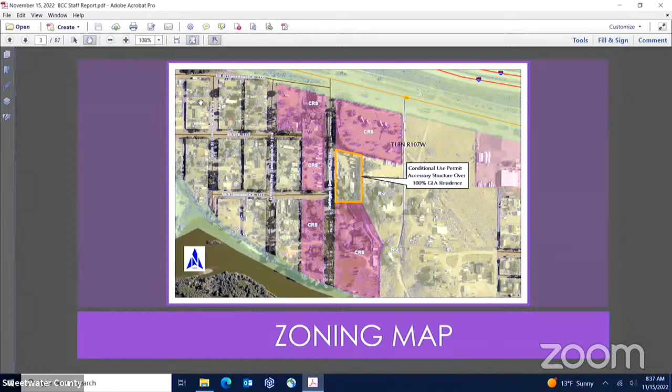Again, there are some R2 adjacent properties, but they're up on the hill and a little bit over. It's definitely mixed ownership in this area of Jamestown. Just a little bit of background: the reason why we're here today is because Corey Bernard is wanting to build a 5,600 square foot garage that will be roughly 35 feet in height and attach it to his existing home.

The garage is proposed to be roughly 70 feet by 80 feet. This would exceed his primary residence by about 2,000 square feet, so it's a pretty large structure on the property. Per our Sweetwater County zoning regulations, this can be done by going through the conditional use process, and that's why we're here today. Just in the last couple of weeks, we've gotten a lot of information coming forward.

So just wanted to let you know that in discussions with both Corey and his wife Bridget, we've been assured this is not just going to be a big metal shop. It'll be stuccoed or finished in something to blend with the house. He wants both the garage and his home to look like one cohesive structure. They plan to use the garage as storage for their motorhome, boat, and other equipment currently sitting out in the weather.

While I was visiting the site with Mr. Jim Zimmerman on November 1st, we were also told that they have already purchased the building materials for this garage, and they are already on site, which you can see in the additional photos when we get to that point. Corey is also still working with his attorney and our Sweetwater County attorney, John De Leon, on resolving an encroachment issue with his retaining wall being in the Sweetwater County road right of way for Washington Street.

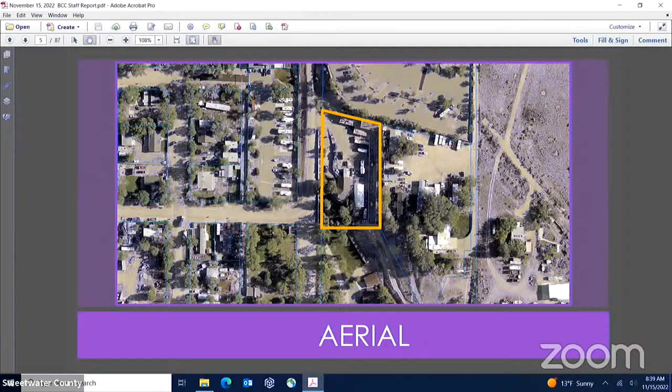Here you can see the proposed garage and where it should be situated on the site. You can see him calling out where those concrete walls and everything are and where it's going to sit in relationship to his house that is currently on site.

Here's the floor plan that he proposed. There will be 4 garage doors on the north side of the structure, and also in conversations with Corey, we've been told that on the west side, facing Washington Street, there will also be large windows in an attempt to make it not look like a big metal building, more kind of make it look a little bit more residential.

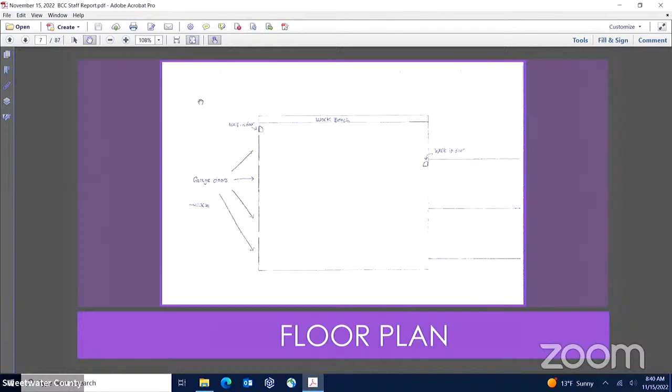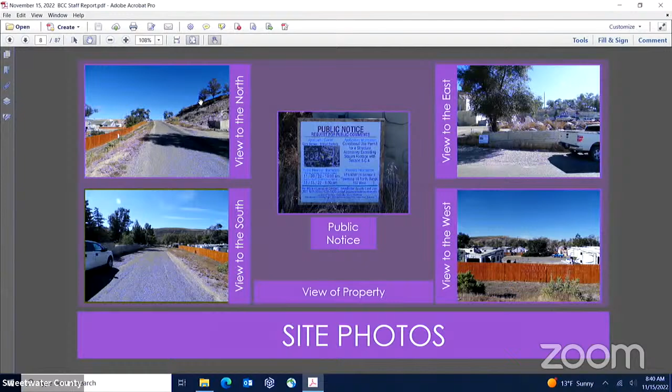Mr. Jim Zimmerman went out and posted pictures on the property for public notice. You can see the retaining wall in the view to the east that is dealing with the encroachment we'll probably get into a little bit further today. We've also chosen to take a few more pictures to show the other retaining walls on the property and just where the building will sit. In the bottom two on the left, you can see where the retaining walls are, and you can see all of his Conex boxes, the motorhome, other construction equipment out there.

That's pretty much where that building is going to be sitting. And then in the top middle picture and the bottom right, that's the retaining wall that is in the Washington Street right of way.

Mr. Chairman. Megan. Yes, when you look at that bottom picture on the bottom left, the bottom two, that's where you're saying the building's going to be placed. How, with the building being 35 feet high, how much of it will be sticking out of that hole above those walls?

That is a very good question. One of the things we can't really do right now as a land use department is we don't have software, and we've not been provided by the applicant even a 3D rendering to judge the height of it with existing features on the property. And I am not seeing Mr. Bernard or his wife here today. I'm not sure where they are at. They were here last week and were told about the meeting this week.

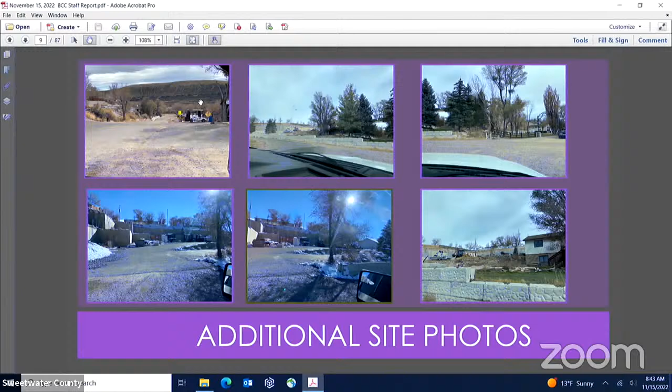Thank you. Thank you.

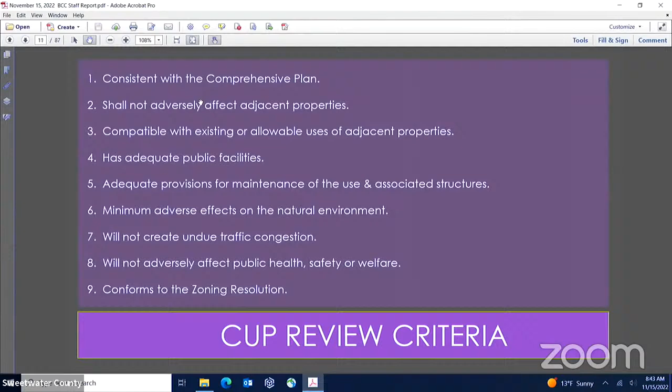We've got 9 review criteria for the conditional use process, and we'll jump right into it. The first one is: is this conditional use process consistent with the comprehensive plan?

The comprehensive plan encourages orderly growth and development in locations that contribute to the economic and social well-being of county residents. I've chosen to combine criteria 2 and 3 for ease of explanation and fact finding.

Criteria 2 and 3: shall not adversely affect adjacent properties and should be compatible with existing and allowable uses of adjacent properties. The proposed garage is nearly 2,000 square feet larger than the existing home and is proposed to be 35 feet tall, which would be the maximum for an R2 zone property. Even though the property sits much lower than the properties to the north and east, the proposed garage would still be extremely large and uncharacteristic for the area.

As of right now, there are no other buildings this large in the tight vicinity shown on the previous zoning map. But keep in mind that on commercial and recreational services, CRS zone property, you can have large commercial structures, as I've mentioned before. So please keep that in mind as we go forward, even though it's not allowed under the use chart — we need to keep in mind how the area is zoned in general as well.

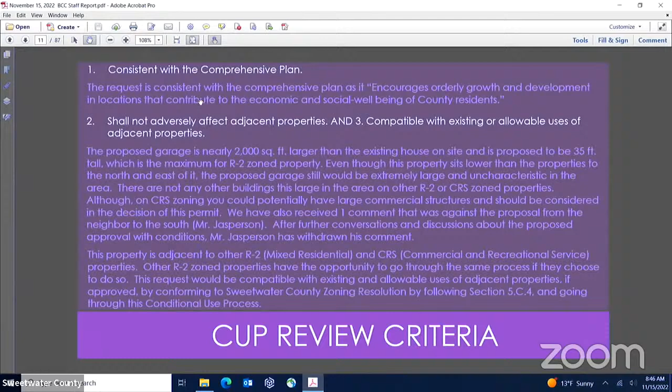Criteria number 4: the property does have all adequate facilities required for a residential property. Criteria number 5: adequate provisions for maintenance of the use and associated structures.

Mr. Bernard will have to get an approved construction permit if this conditional use permit is approved. He has already applied for a construction permit, so we have that on file — that's actually one of the conditions we'll get into further. If both the conditional use permit and construction permit are approved, Mr. Jim Zimmerman will have to go on site to inspect the garage after construction is complete.

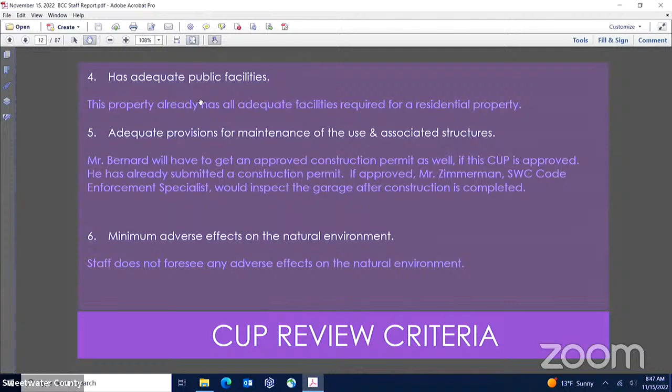Criteria number 6: staff does not foresee any adverse effects on the natural environment. Criteria number 7: will not create undue traffic congestion — as long as the garage is used for residential purposes, staff sees no problems there. Will not adversely affect public health, safety, or welfare, and staff does not foresee any issues with these items.

And criteria number 9: conforms with the zoning resolution. This request does conform, since that is the whole reason we are here today — to go through the conditional use process.

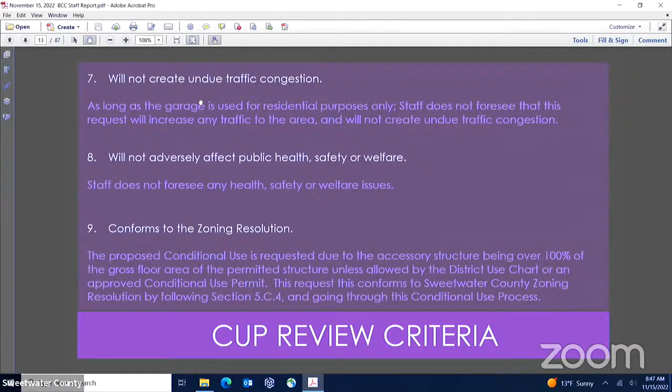Colorado Interstate Gas was the only agency that responded to our comment forms that went out, and they don't have any facilities in the area, so they have no concerns with this conditional use permit.

At last week's meeting on November 9th, 2022, the Planning and Zoning Commission voted 5-0 to recommend approval with the following conditions: the wall encroachment into Sweetwater County right-of-way on Washington Street is to be resolved prior to approving the construction permit for the garage.

Shipping containers are to be removed from the property once the garage has been constructed. The exterior of the garage is to be finished, whether it's stucco or decorative rock — it's not just to be a big metal building. All these criteria were very well hashed out in the meeting last week.

Commissioner Lloyd was there and can offer further explanation. That's all I have at the moment, Mr. Chairman. Thank you, appreciate that. Questions for Megan? Mr. Chairman, Commissioner Wendling.

Yeah, just a couple, two or three. Under condition one, the issue to be resolved regarding the encroachment of the retaining wall — what were the options discussed for the owner? The options discussed were, one, for the wall to be completely removed.

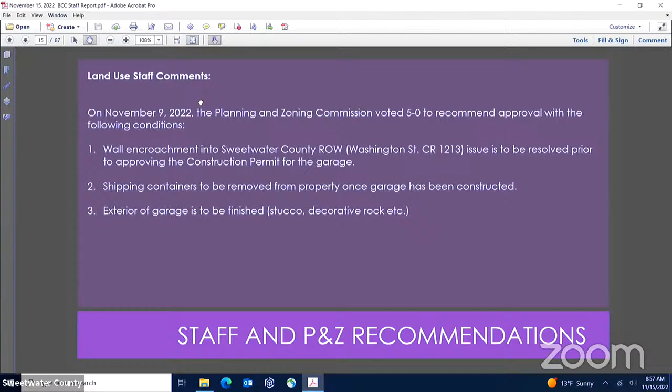So I do want to point out some people that are here for the Board of County Commissioners' benefit. As far as Love's Truck Stop, we have Mr. Kim Van Dyke here. Also online, we have Darren Kaufman with WYDOT. We have Amelia Jordan with Apex, senior project engineer on this project. Terry Lee with Joint Powers Water Board, and Brian Seppi also with Joint Powers Water Board. Scott, I don't know your last name, but when you get up to present, you can give that. That'd be great. So let's get started, Mr. Chairman.

So the property owner is Rose Rock Holdings, which is also the applicant. And we all know where Love's Truck Stop is, 8901 Highway 374. Site is approximately 4,000 feet from Jamestown Rio Vista residential subdivision. Zoning is commercial, within the growth management area, Green River Fire Response, within the Jamestown Rio Vista Water and Sewer District. Rocky Mountain Power provides power, and then we have the proposed private sewer treatment facility, and it's on Dominion Energy Gas.

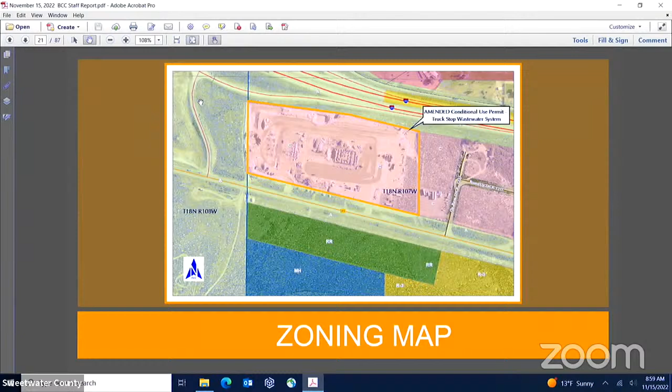There is an aerial photography picture of the site, which shows you the zoning that surrounds it. Just for clarification, that rural residential to the south is commercial - that was changed a year or so ago. Properties to the east are commercial. To the west is agricultural, which is undeveloped and owned by the Bureau of Land Management. And then you have the interstate and the golf course to the north of the interstate, which you can see in the aerial photography. So there's a commercial subdivision just to the east of that.

So as you know, we... having problems. If it's not the voice, it's the microphone.

Okay, I don't know what's going on today, Megan, but Love's is proposing to amend their existing conditional use. Under the previous permit, we had an underground injection sewage disposal system that was approved by the Wyoming Department of Environmental Quality. That system has failed, and so the applicant is seeking a sanitary sewage treatment facility with an activated sludge wastewater treatment system. The treated effluent will be sent to the Green River. WYDOT, I believe, has approved the permits to go into the state right of way. The county has not approved any road crossings because they have to go through this conditional use process.

So the existing conditional use for the truck stop facility includes a convenience store, automotive pumps, truck fuel pumps, fast food restaurant, and tire shop. The auto and truck fuel pumps are under separate canopies adjacent to the convenience store and fast food restaurant, and the tire shop is a separate facility.

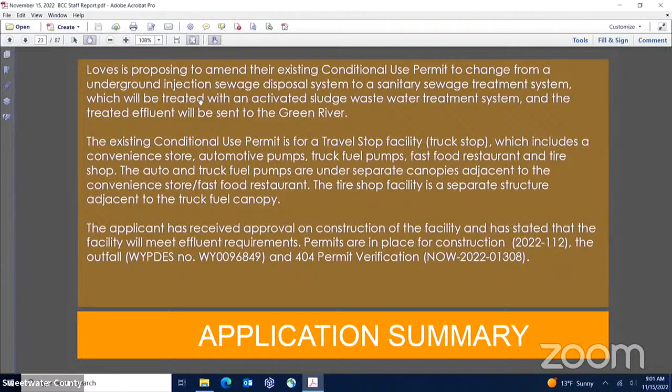And then here is a site plan, drainage plan. If you look on the bottom right of the drawing, that is actually where the sewage treatment facility will be located.

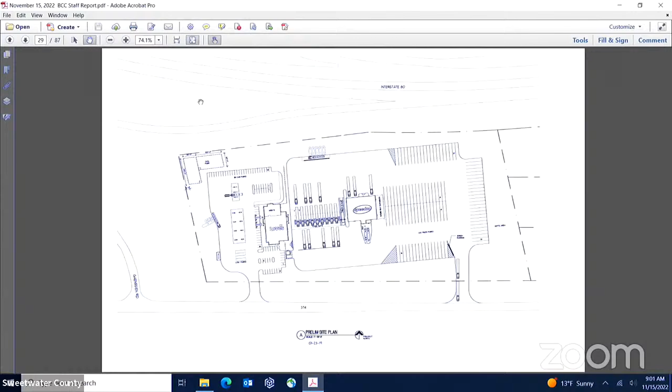And the applicants here are going to go through a PowerPoint to explain that system. Okay, I'll go through the permit. It's quite a lengthy permit, and it has effluent standards in there. Okay, and here's the site plan again.

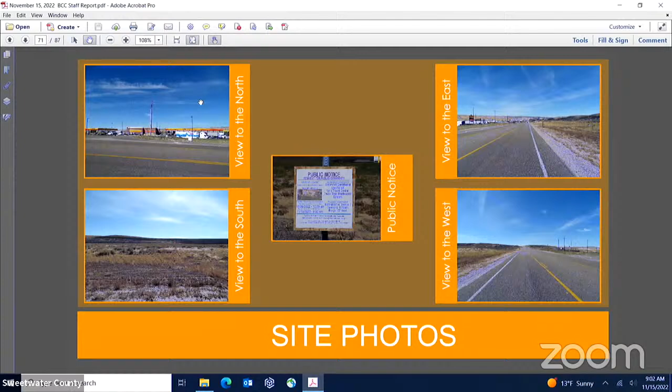And then the site photos, as you've all been out there, the property to the south is undeveloped. Part of the reason it is undeveloped is the developer or property owner there wants a high density type of subdivision, and you can't have that without public sewer. As we know, there's no public sewer out there.

There have been improvements also, as you've seen, on Highway 374 out there that the applicant was required to do under the previous conditional use permit. So is it consistent with applicable provisions of the comprehensive plan?

So does it continue in a manner that contributes to economic and social well-being? As we know, this site provides local jobs, a truck vehicle stop for travelers of Interstate 80, for food and motor vehicle fueling services, which includes truck service and maintenance. In addition, the site provides additional space for semi-tractor trailer parking when the highway closes.

The reason for the amendment is, again, already went through this, is due to the failure of the system. The Joint Powers Water Board is recommending more frequent sampling than the monthly required by DEQ.

Just for your information, point of information, the DEQ only requires monthly monitoring, and then those monthly reports are submitted on a quarterly basis. So the concern there is that those reports are only being submitted on a quarterly basis. So you'll see in some conditions that are being proposed, some more frequent sampling.

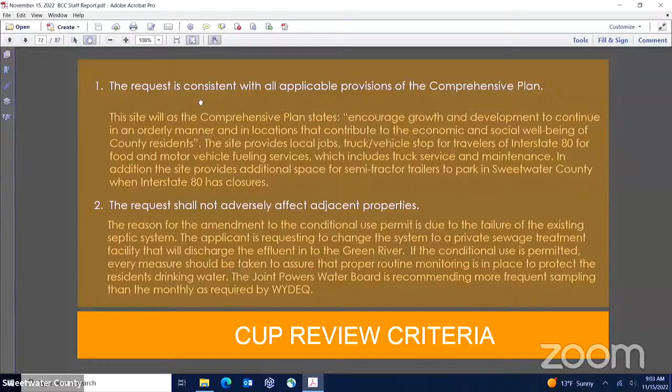Is it compatible with existing or allowable uses? Again, this is commercial. As far as the facility goes, it has commercial types of uses around it.

And can the request demonstrate adequate facilities? Currently, because this existing septic has failed, the applicant owner is having to pump and truck the sewage from the facility to the City of Green River sewage system. The applicant is proposing to install a sewage treatment facility and discharge that effluent into the Green River, which will be upstream from the Joint Powers Water Treatment Facility. And you can imagine there's been some concerns about that.

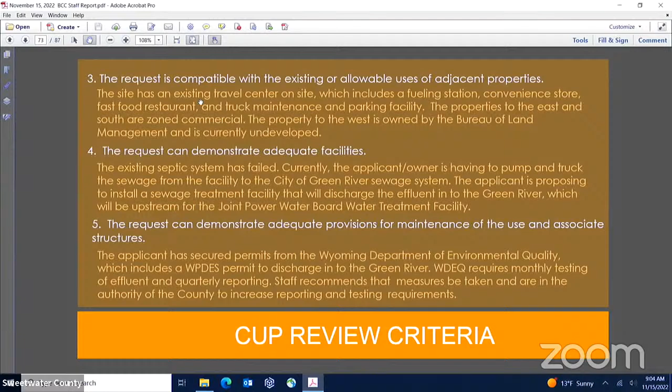The request has minimized to the greatest degree possible adverse effects on the natural environment. Staff does suggest that obviously the best long-term solution for this area is public sewer. As when this report was actually created, it was before the election, and so we've seen the specific purpose tax has passed.

And a part of that is a sewer line out to the Jamestown area. Staff recommends, if planning and zoning approves it, that a timeframe be placed on Jamestown Rio Vista to pursue public sewer options. So when we get to the conditions, you'll see that there is a timeframe on this permit of 5 years. The reason for the 5 years is the Planning and Zoning Commission did feel, because we discussed 2 years, 3 years, and some other options, there to speed things along so that they could get connected to the public sewer.

The Planning and Zoning Commission was a little bit concerned that too tight of a timeframe would not give Jamestown Rio Vista enough time to apply for the proper permits, do a master plan and things like that. So that's why the 5 years was placed on there.

And again, adversely affecting public health, safety, and welfare -- that's our biggest concern, obviously, that there's constant monitoring. When staff actually recommended monthly, we went down to weekly monitoring now, which is what's been recommended by the Planning and Zoning Commission. And then those weekly reports would be forwarded to both the county and the Joint Powers Water Board.

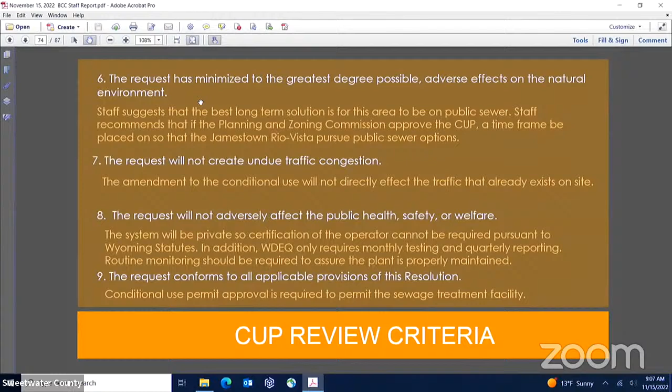So Colorado Interstate Gas had no concerns, according to the Public Works Director, on the crossing permits. Mr. Legursky is waiting to see the results of this hearing to see whether those will be passed or approved. WYDOT's Darren Kaufman, also online, had no objections to the system, but there are some punch list items not yet fulfilled by Loves, and they're asking that we include those as conditions so they are finished and finalized, some electrical work, things like that. That is one of the conditions on the permit.

There have been some comments from the Director of Public Works, which were included with your packet. I won't go through these; they're here if there are any further questions. The Joint Powers Water Board had some concerns, and they are also here. Andy Hooten with Green River City's comments have also been included. It was a 3-hour hearing at the Planning and Zoning Commission, which heavily scrutinized the permit, and it was voted 5-0 to recommend approval with these conditions.

The owner operator of this treatment facility shall operate and maintain the plant in accordance with all applicable federal, state, and local requirements. The operator of the plant shall be a certified operator as proposed by Loves. We cannot require by state statute that it be a certified operator. There was a lot of concern on a private system having a certified operator, because by state law you do not have to have one. We were pleased to hear that Loves is proposing that the operator be certified, so that has been proposed by the applicant and we've included it as a condition.

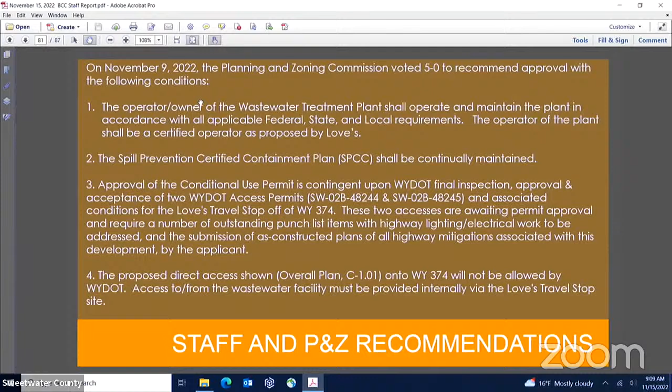Condition 5: the applicant owner operator of the wastewater plant shall submit a copy of the weekly effluent sampling requirements as outlined by Table 1C of the WPDES permit, and failures, to the Sweetwater County Land Use Department and Joint Powers Water Board for review. If the weekly report shows effluent limits are exceeded, staff shall forward a copy of the report to the Wyoming Department of Environmental Quality. 2 Sweetwater County Type A licenses will need to be obtained in order to cross Oxbow Drive and Ox Yoke Drive.

Both roads will need to be patched at a minimum of 4 inches of asphalt pavement and 8 inches of grading road base for the entire length of the road crossing. Only one road can be closed at a time for construction operations and patching. The license will not be granted by Sweetwater County until the WYDOT easement is granted and the Water Quality Division has reviewed and enforced it.

All trash dumpsters shall be covered and maintained with a solid fence area; that was on the original conditional use permit. All recommendations outlined in the July 2019 TIA shall be implemented and maintained. The conditional use permit is valid for a period of 5 years from the date of Board of County Commissioner approval.

Landscaping will be continually maintained on site according to the 2019 landscaping plan approved with conditional use permit 2019-010 and construction permit 2019-144. And if a public sewer line is constructed within 400 feet of the property, owner shall connect onto public sewer.

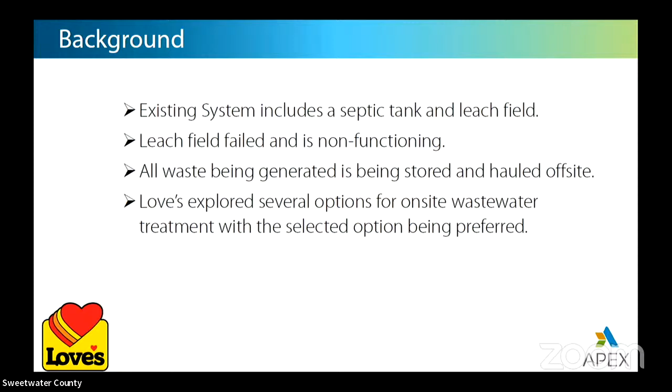We also talked to, I believe, the engineer of Green River when we first started this project, about what other options there were, and whether Love's could help pay for the sewer line in that area, since Love's would prefer to be on public sewer. At the time there was no money and they had no idea what the schedule was going to be, so they just told us to proceed with what we were doing.

You can see a brief overview — it's a little small, but essentially you have the treatment system up here, you can see my hand. The line comes out and runs along the right of way all the way down to Green River and then discharges into the river.

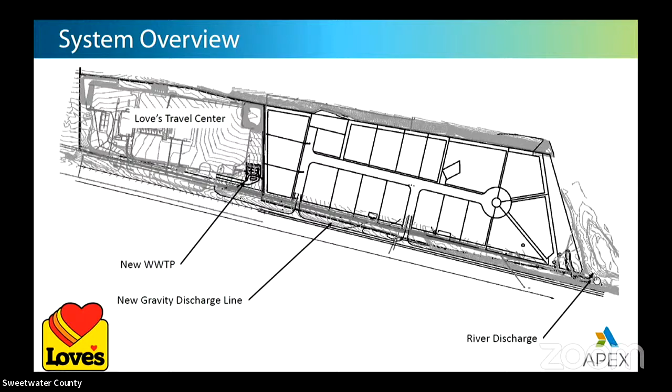This is a close-up of the system. A couple things to note: one, you can see the access has been moved so it will be compliant with WYDOT. The other thing is the existing septic tank is going to stay in place, and there will be 3 individual trains that function. The first 2 will be installed completely, set to take up to 23,000 gallons a day, which is the peak flow we've been monitoring while they've been hauling.

The third train, closest to the road, we're going to install the tanks and piping, but not the internal equipment — that's just a backup in case we need more capacity in the future. We're having generators and automatic transfer switches. At the end, we're having a post-aeration tank just to make sure the dissolved oxygen is high going into the river. These also have a recirculation system with an anoxic tank, and some nutrient control as far as nitrate is concerned.

But not phosphate. What would that third tank add in capacity, if and when needed? It would add another 12,500 gallons a day if needed. Yep. And it's really the full third train, not just the tank.

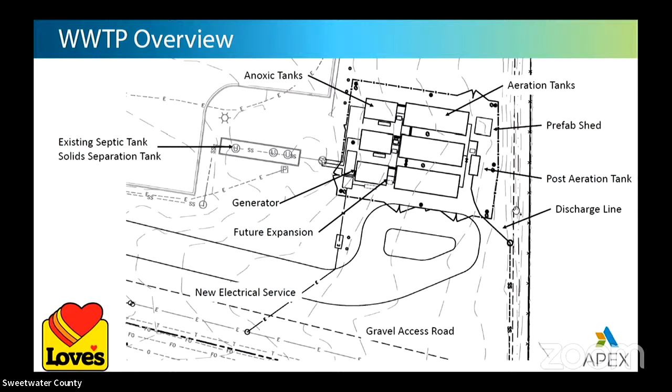So with the existing septic tank right now, we have a fairly fine screen system in it. Solids settle out, everything gets screened out, which is important because we're putting in a membrane bioreactor. And it has a real-time monitoring system on it. I'll go into that a little bit later with some of the PLC printouts.

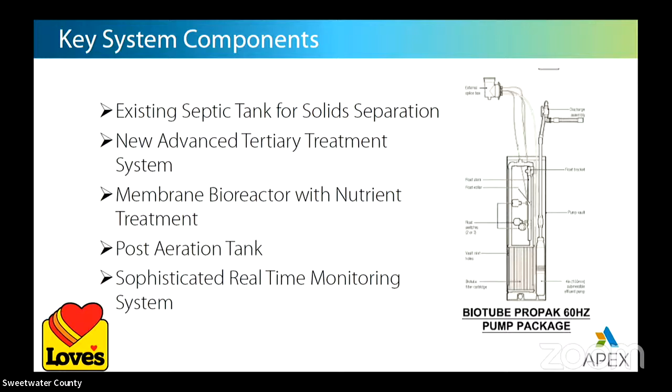That's the membrane bioreactor, right? It is an ultra filter, which will filter down to less than 1 micron. Essentially what happens is the waste is aerated, circulated, and then the only way for it to leave the plant is to get vacuumed through these plate membranes. So as far as a pond overflowing, that doesn't happen here. There's no way for the water to get out.

If there were to be a backup of that magnitude, you would end up with some of that partially treated wastewater on the surface at Love's, which they would have to react to immediately. So it's not like that would ever end up down to the river. Mr. Chairman, question.

Is there a plan in place at Love's to react in case this does occur and it backs up? Yes, they have a contractor on staff right now who's taking care of all of the hauling, and they have people that are local. It's Jackman Construction who can get out there and take care of the issues if needed.

One of the other things with this system is it is set up for 5 days of detention time. Most package plants only have about 1 to 1.5 days of detention time. We use 5 days, and we can do that for a couple of reasons. One, we don't have to worry about the internal biology getting old, because that will help with clarification. But in this case, we have the filter, so we don't need to worry about it.

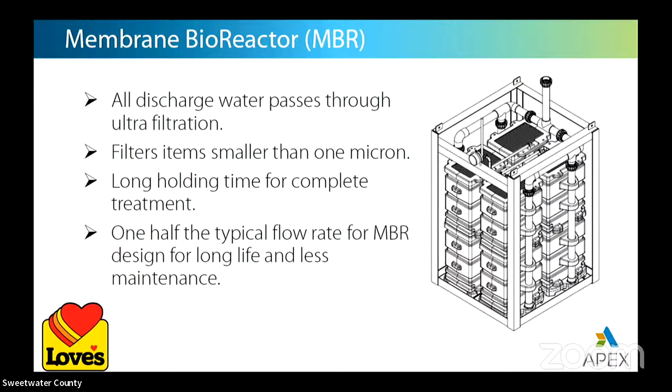The other side of this design is we have half of the typical flow rates for these filter systems. So what we find is we have very long-term use out of them before they need cleaning. We haven't had failures with them. In one case, we had a system where a blower went down, and we were still able to run all of the flow through only one of the trains so that we could continue to treat water to the same quality while we had to get the other blower replaced. So there's redundancy upon redundancy.

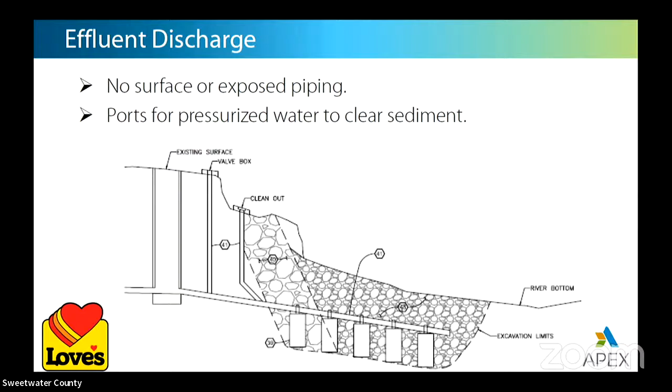This is the discharge pipe. It's essentially a perforated pipe that's going to be underneath the riverbed and will percolate up into the riverbed. We wanted to make sure that we were smooth with the bottom of the river because we know there are some siltation issues in the river. And this is what's been approved by the Army Corps of Engineers.